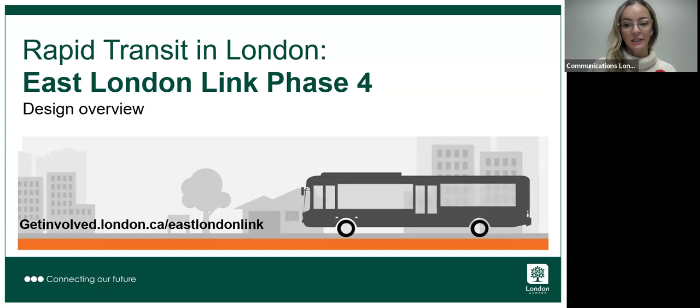Before we begin, we'd like to acknowledge that we are gathered today on the traditional lands of the Anishinaabe, Haudenosaunee, Lenape, and Attawandaron peoples. We honor and respect the history, languages, and culture of the diverse Indigenous people who call this territory home. We acknowledge all the treaties specific to this area: the Two-Row Wampum Belt Treaty of the Haudenosaunee Confederacy, Silver Covenant Chain, the beaver hunting grounds of the Haudenosaunee Nanfan Treaty of 1701, the McKee Treaty of 1790, the London Township Treaty of 1796, the Huron Tract Treaty of 1827 with the Anishinaabe, and the Dish with One Spoon Covenant Wampum of the Anishinaabe and Haudenosaunee. The three Indigenous nations that are neighbors to London are the Chippewas of the Thames First Nation, Oneida Nation of the Thames, and the Munsee-Delaware Nation, who all continue to live as sovereign nations with individual and unique languages, cultures, and customs.

The purpose of today's webinar is to share information regarding the designs for the East London Link Phase 4 project, planned for construction in 2025. We'll also explain some key elements and streetscape concepts and share early information about plans for construction, how we're mitigating construction impacts, and how you can stay informed about the project. Following the presentation, we'll host a Q&A session where you can submit your questions using the Q&A button at the bottom of your screen.

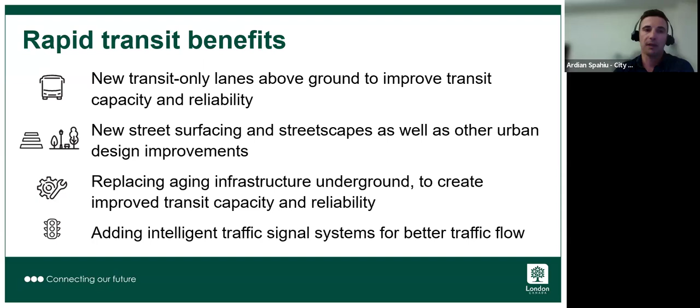The City of London completed a large environmental assessment process that reviewed options for a citywide rapid transit network. The environmental assessment was completed for the whole system, and the overall network was broken down into 5 component pieces, with Council prioritizing implementation of 3 of them to connect downtown with the east and south ends of the city. Rapid transit will add new transit-only lanes to improve transit capacity, frequency, and reliability. Above ground, it will add new street surfacing and streetscape, as well as other urban design improvements. Underground, the project will replace aging infrastructure, and it will also add intelligent traffic signal systems to improve overall traffic flow.

The three rapid transit projects that Council has prioritized implementing are the Downtown Loop, the Eastern Corridor which is called the East London Link, and to the south, the Wellington Gateway. These 3 projects represent approximately $454 million worth of work, including both federal and provincial funding.

Engineering design work began in 2020 and construction kicked off in 2021 with the first phase of the downtown loop. The approximate timelines for construction are 2021 to 2023 for the downtown loop. We're completing some finishing work for phase 3 of Wellington Street between Queens Ave and York Street, which is phase 3 of the downtown loop. Otherwise, downtown loop should be completed shortly.

For the East London Link, it's 2022 to 2026. We're currently constructing 2 sections of phase 3 of Dundas Street and Highbury Avenue. For the Wellington Gateway project, it is planned between 2023 and 2027. Phase 1 is nearly complete with some finishing touches planned later this year, and phase 3 and 4 are currently underway on Wellington Road, as well as the Clark's Bridge widening project.

Once built, the new rapid transit service will be operated by London Transit as part of the existing public transit system with the same fare. Ultimately, the spine of frequent, reliable rapid transit corridors will create the opportunity to redirect more local service to neighborhoods, improving transit across the full system.

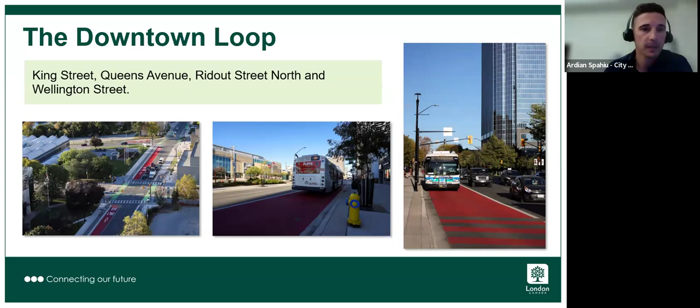Phase 2, Watson Street to Wilkins Street, is planned for 2026 to 2027; we're currently working through the detailed design for this phase. Phase 3, Wilkins to Montgomery, is currently under construction and planned for 2024 through 2025. Phase 4, from Montgomery Gate to just north of Exeter at the Commons entrance, is planned for 2024 and is currently underway, continuing through 2025.

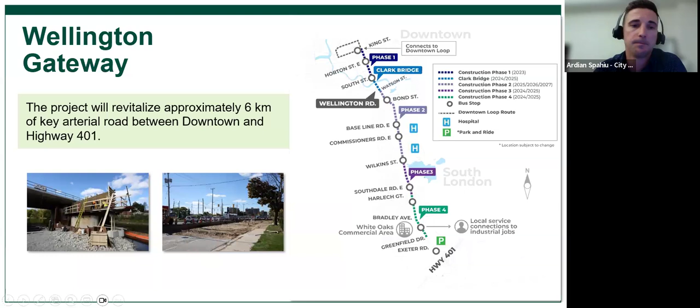The final project we're presenting in detail today is the East London Link Phase 4. But before diving into the details, I'd like to provide an overview of the East London Link corridor for those who may not be familiar with the project.

The East London Link will revitalize more than 6 kilometers from downtown to Fanshawe College, adding rapid transit and transportation improvements, including transit links to the city's eastern industrial employment areas, while also replacing and repairing aging sewers and water mains. This slide provides an overview of the full length of the East London Link project, connecting to the downtown loop at Wellington Street.

The project will extend easterly along King Street to Ontario, then follow further east along Dundas to Highbury Ave, north to Oxford Street, and then finally further east, terminating at the Fanshawe College property.

The first phase of construction for this project started in the spring of 2022 on King Street from Wellington Street to Lyle. In 2023, phase 2 covered King Street from Lyle to Ontario, up Ontario to Dundas, and Dundas from Ontario to Dundas and Egerton.

This year we're building sections of phase 3 along Dundas Street and Highbury Avenue. Subsequent phases of East London Link will take place between 2025 and 2026, including phase 4, which is the focus of today's webinar. If you haven't been in Old East Village recently, the photo to the left features the new curbside bus lanes on King Street at Ontario by the Western Fair Market.

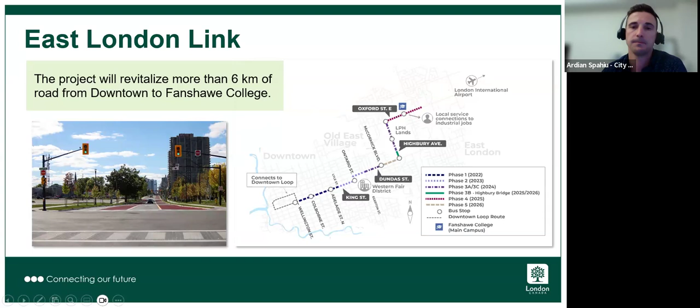Thanks, Ardian. Hi everyone, I'm Andrea Hamilton, the Program Manager for the East London Link Corridor. Thank you for joining us today to learn more about East London Link Phase 4, which is planned for construction in 2025.

Phase 4 is the next phase of construction as part of the East London Link project, and it will extend from Oxford between Highbury and a few meters east of 2nd Street. The work on Oxford Street will result in widening and reconstructing the road to accommodate center-running bus-only lanes.

It'll add a few new rapid transit stops and upgrade the local transit terminal at Fanshawe College, make repairs and upgrades to underground water and sewers, and replace and implement a concrete median in the center of the road.

We'll upgrade and add new signalized intersections on Oxford Street at John Paul II Catholic Secondary School entrance and Oxford Street at London Lane. And we'll add a new intersection pedestrian signal just east of Jim Ashton.

We'll also be installing new upgraded active transportation facilities for cyclists and pedestrians on both sides of Oxford Street, and we'll install new trees, other landscaping, and urban design elements as well.

As previously mentioned, the construction is planned for 2025, and we will start in the spring, and it will go until approximately fall of 2025. But I'll share more about construction later on.

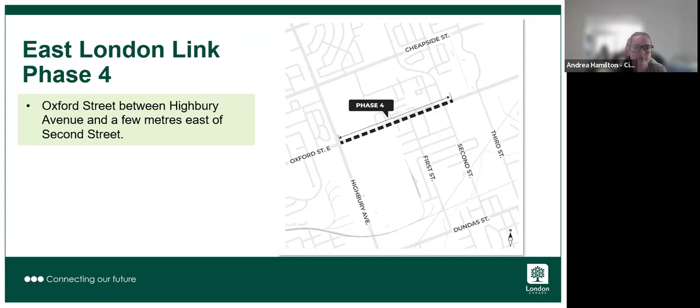I'll now pass it on to our consultant team, who will provide an overview of the design.

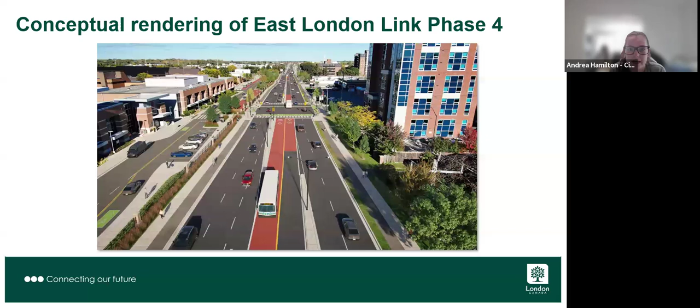Well, hello everyone. My name is Jeff Kelso. I'm a civil engineer and project manager at AECOM's London office.

Over the course of the following slides, I'll provide an overview of the design features associated with the project for the remaining work on Oxford Street between Highbury Avenue to the east limits of the job east of 2nd Street.

The limits of phase 4 of the East Link project includes the area along Oxford Street from the east side of Highbury Avenue to approximately 200 meters east of Fanshawe College Boulevard and 2nd Street. The East Link Phase 4 project also involves improvements and reconstruction along London Lane, located parallel to Oxford Street along the southerly limits of the Fanshawe College campus.

Now we'll take a look at the corridor in a bit more detail on the following few slides.

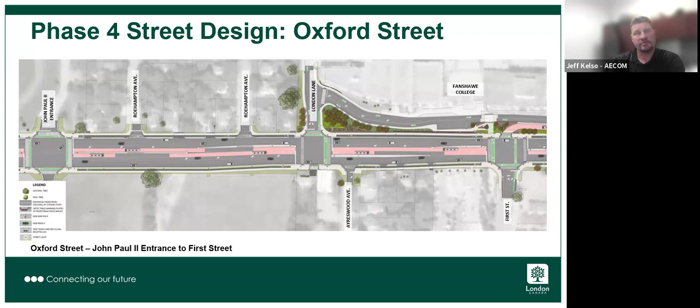As part of the work being completed on Fanshawe College campus, for those familiar with the existing London Lane, there will be a new intersection created at the west limit of the college frontage, west of Ayerswood Avenue, along with some adjustments to the intersection at Oxford Street and First Street. The London Lane connection west of Ayerswood Avenue will be open to all modes of traffic, while the connection at Oxford Street and First Street has been designed for buses exiting the campus only. There will be pedestrian crossing and cycling lane enhancements at the Oxford Street and First Street intersection to accommodate students accessing Fanshawe College campus.

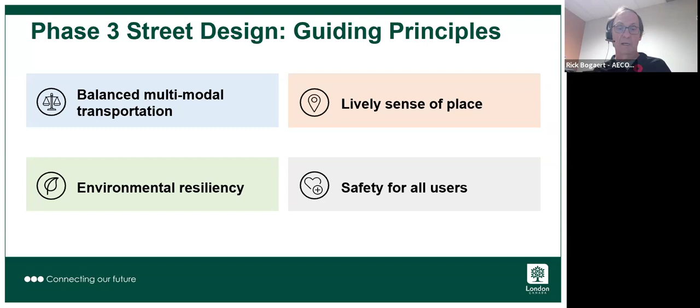This will be achieved by integrating accessibility design elements such as detectable warning plates that meet current accessibility standards at all pedestrian crossings, and providing sodded boulevard or textural and tonal differences of paving material between the road curb and the main path of travel. The last safety consideration is to follow the principles of crime prevention through environmental design, such as visible stops and improved lighting. Next slide, please.

What we did mention was implementing new native deciduous trees in the boulevards, and then the median, as we mentioned, with plantings along the Fanshawe College frontage. We want to tie that into and replicate the existing theme on the campus itself.

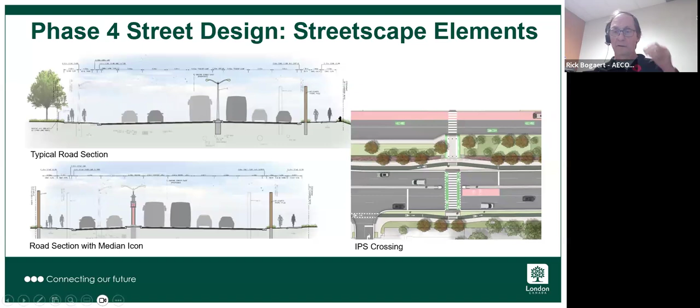Next slide, please. So this will include new street lighting, again to be consistent with other streetscapes, detectable warning plates in crosswalks, and enhanced pedestrian crossings at station stop locations and at intersections.

We want to use a stamped asphalt treatment that has a decorative pattern and color consistent with the entire BRT. And then lastly, new bike racks, benches, and new trash and recycling receptacles that will also be consistent with the City of London streetscapes.

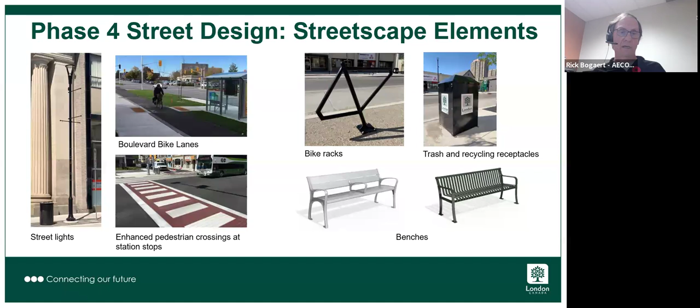Next slide, please. So I'll think back to you, Andrea. Thanks, Rick. Okay, so let's talk about what's ahead for construction.

As I previously mentioned, phase 4 of the East London Link is currently planned for construction from spring of 2025 until approximately fall of 2026. During construction, work hours will typically be between 7 a.m. and 7 p.m.

But there will be some overnight or weekend work potentially that will happen, and this will be required to help minimize traffic impacts and disruption to businesses. For example, we typically see this when accommodating water service connections.

We know construction can be disruptive, and the city aims to provide enough advance notice about any detours or impacts that you might see so you can plan ahead. The contractor will be required to provide proper advance notice, and our teams will amplify this information through different channels.

The project team will help host a pre-construction meeting in the spring before work begins. At this meeting, we will be able to share more information about construction staging and timelines once the contractor is awarded the project and a more defined schedule and staging plan is known.

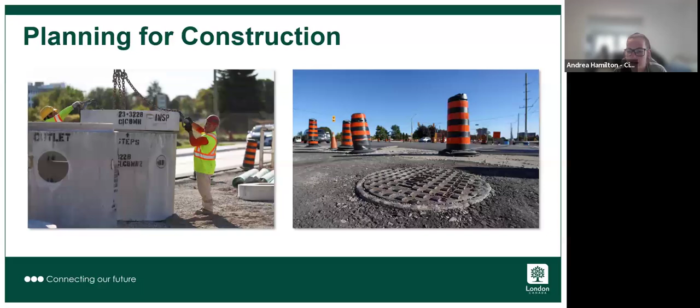In the meantime, though, if you have any questions or concerns about access, or if you have any special access needs, please reach out and our design team will be happy to help coordinate with you and provide any additional information or make adjustments as needed.

For this phase, we anticipate lane restrictions during construction, but we will be maintaining traffic on Oxford Street. Construction will be broken up into stages to help minimize impacts, and we're aiming to maintain at least a minimum of one lane in each direction for traffic. However, there may be some left turn restrictions due to safety concerns during construction.

There will be traffic calming measures such as bollards or speed bumps applied on neighboring streets as mitigation where cut-through traffic is anticipated, and we'll share more details on that during our pre-construction meeting that we'll host in the spring.

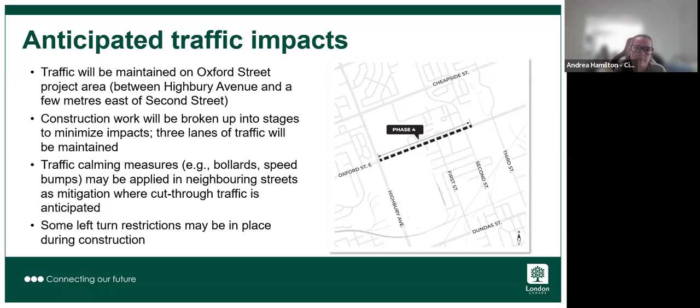Over the past few years of construction in the core area, we've learned from businesses and residents about their priorities, and we've heard that some of the highest value items are sidewalk and pedestrian access and vehicle and road access. We heard the best ways to keep you informed are through a combination of email notification, signage around the site, notices delivered to your door, and in-person conversations with project representatives.

We also heard some great ideas for how we could improve the way that we do things and put many of those in place. We'll be keeping this feedback top of mind as we work to mitigate the construction impacts. The city will continue to work towards a high level of communication and coordination for the East London Link project to minimize and mitigate potential impacts to residents and businesses during construction.

Some examples of tactics you will see implemented: wayfinding signage with construction plans and timelines, public service announcements to the media, social media notifications, direct outreach to impacted properties, businesses, and residences, and email communication to ensure everyone has the most up-to-date information about the project.

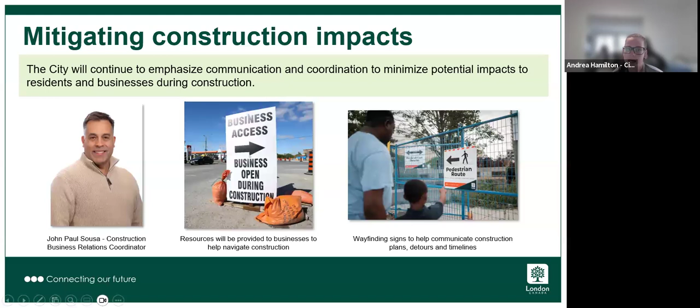Over the next month, we'll be finalizing our detailed design. So if you have any special access needs to your business or property that we should be factoring in, please reach out to the project team no later than Friday, November 15th. That's next Friday, at East London Link, at eastlondonlink@london.ca.

You can also give us a call at 519-930-3518. This project is being tendered in November, and construction is anticipated to begin in spring 2025 until approximately fall of 2026. Some advanced work is planned for winter of 2025, including tree removals and utility relocation. A notice will be sent to nearby residences, businesses, and property owners ahead of this pre-construction work.

I'll pass it over to Claudia, who will share more information about how you can stay informed during the project.

Thanks, Andrea. So there are different ways that you can stay informed about construction. Andrea just mentioned some of them, like signing up for email notifications. You can do that on our website, which is on the screen: Get Involved at london.ca/EastLondonLink. We also use different tools about the project, like notices, social media, and public service announcements. So if you don't follow the City of London on social media - that's Facebook, Twitter, and Instagram - please do that so you can stay up to date on any information about the project or construction.

But some dates that I want to highlight for you here: we are starting today an engagement period for this project. So if you have additional questions, you can send them to us using either the Get Involved site or through any of the contact information on the screen, the phone number, which is 519-930-3518, or directly to the project team at East London Link at london.ca.

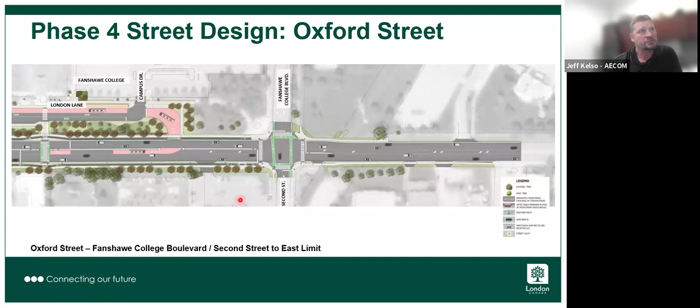Okay, like this area here? No, way over to the right. Like right here? Right, okay. Even right there? Yep, okay. So you can see the existing driveways and properties and where those exist relative to the limits of the road work. Thanks, Jeff, I see more questions coming.

Okay, I see a question here. Are there any plans to go further east? I'm not sure, Andrea—sorry, Jenny or Ardian—if you're able to respond to that question about whether we have any plans to go farther east.

Sorry, I can take it from here, Jenny. We don't have direction to go any further east from this project at this time. There was discussion and deliberation during the environmental assessment through council, but there is no direction for us to do anything further east of the limit of this project here.

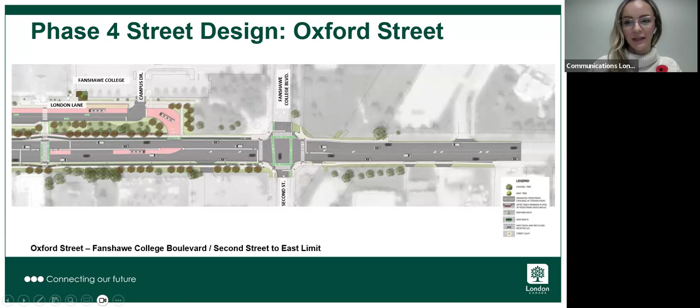Thank you. The next question is from someone who wants to know if there will be an island being put in place, assuming in the middle of the road with the center running lanes. Is it an island being placed, or is that part of the center running lanes?

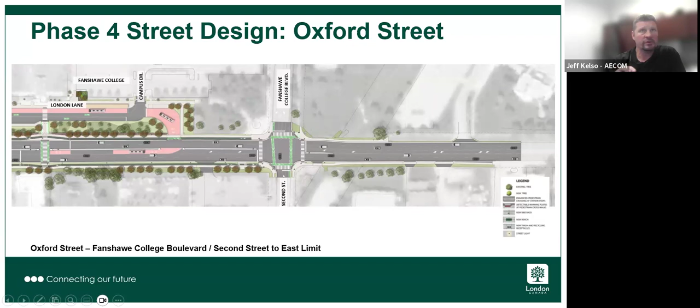Yeah, if you want to go to the first figure, Claudia, or whoever's in control here, that one has the whole limit of the job with the rendering. You can kind of get a feel for where the median will be constructed and how the lanes will be.

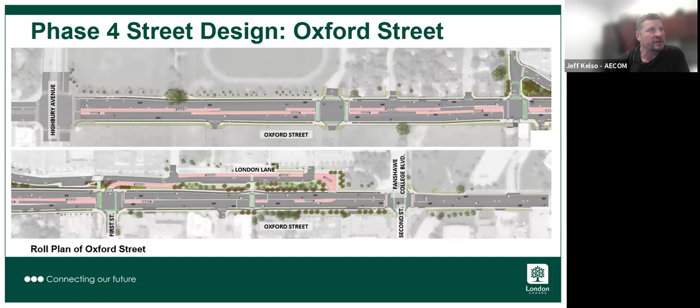Is this the one you're looking for, Jeff? Yeah, okay, that's the one. I skipped over it maybe too quickly, but this is for the whole job. What you see here is a rendering—a digital animation of what the design drawings look like, superimposed over aerial imagery, probably Google Maps, to reflect the limits of the existing conditions outside the road allowance. If you wanted to go to the next one through these slides, you can see where the medians actually are.

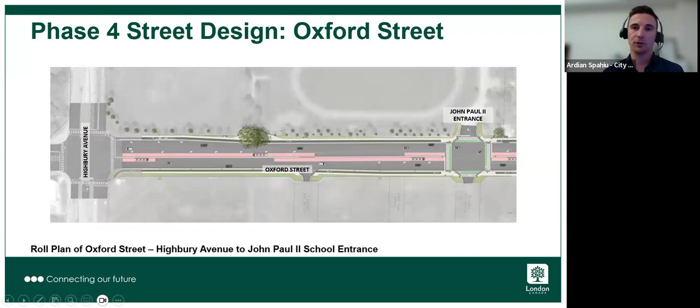Claudia, if I might add, there is a slide that describes this a little bit better, and we can go to that. It's related to the center median. It's an important feature for the implementation of rapid transit, or anytime you're widening a road to accommodate this volume of lanes.

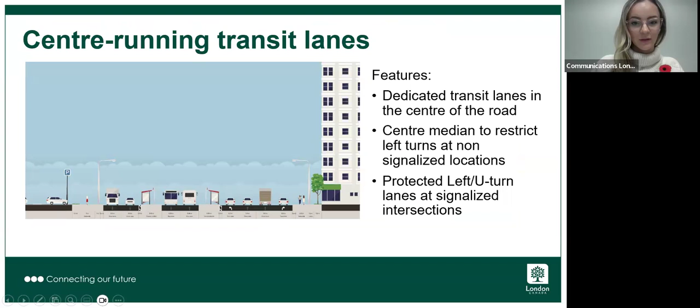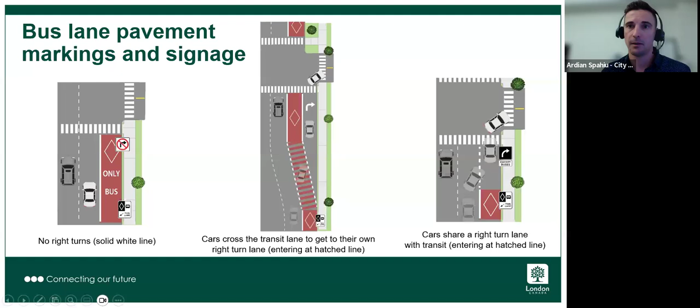That speaks to it a little bit better. There's another slide, I think, after this one—let me just find that. Are you looking for this one? No, it's called center median, and it speaks to the operations. Maybe I can touch on that if it's helpful to the discussion. Sorry, I found it. No worries. Perfect, so maybe I'll just, because I think it aligns with the question.

Yes, there is a curb height 6-inch median proposed as part of the design. For both curbside and center-running configurations, rapid transit requires a center median to maintain frequent, reliable transit operations. In the case of Oxford Street, the center median ensures the center-running bus lanes are not blocked by drivers attempting a mid-block left turn. As a result, left-turning movements will be restricted to signalized intersections, and driveways or minor streets that are not signalized will change to right-in, right-out access to ensure safety for all users.

If you look at the image on the screen, under note A that's a signalized intersection with no impacts or changes. Under note B, a non-signalized intersection or minor street or driveway, you'll be able to make a right in, right out, because there's no signal to safely navigate through there, and because of the median.

Similarly, if you're coming out of that unsignalized driveway or minor street and trying to make a left, what you end up having to do is make a right, approach the nearest signalized intersection, and there you'll have a U-turn signal, a protected left turn signal that will enable you to make a U-turn. I just thought that might be helpful to expand on the median question.

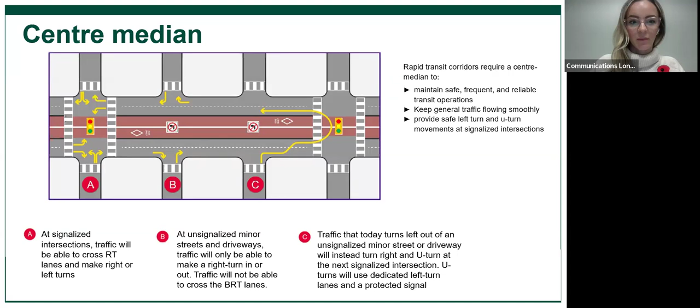Sorry, I think this question is asking how far this is stopping from 3rd Street. So are we only going, did you say 200 meters from 2nd Street? About 200 meters east of 2nd? Yeah, I can try to determine that right now. I don't know the answer.

Yeah, I guess the person just wants to know how far we are from 3rd Street. I'm just trying to do a quick measurement on Google Maps here. It's plus or minus 100 meters from 3rd, I'm just eyeballing it, but I don't know if Jeff has a more accurate number. I'd put it around 180 meters west of 3rd Street, Ardian, in that magnitude.

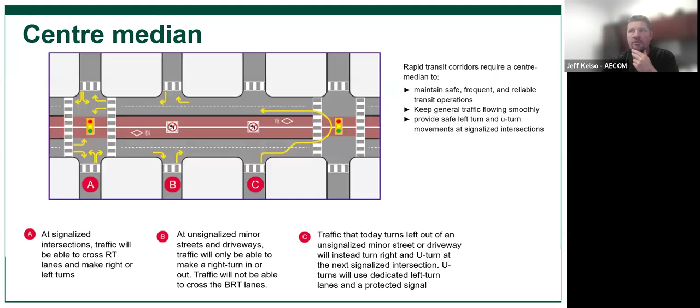And I think we clarified the reason it's going past 2nd Street. It's a tie-in sewer, so there are some life cycle replacements happening there, and that's driving the works east of here.